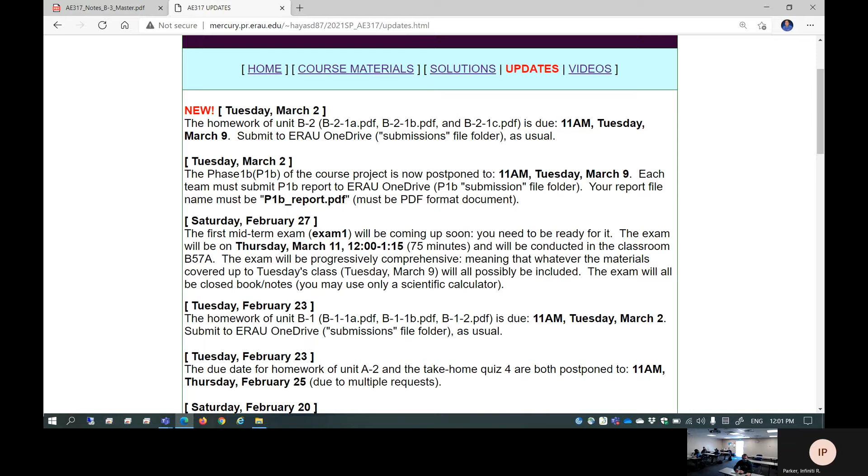Okay, that's one, sort of. Wait, Dr. Hayashibara? Yes? What's the likelihood of Unit B2 being on the exam? Well, you have almost a week to do it. I mean, you can't do it like a 3 problem. What's the chance of a question from B2 being on the exam? Well, I don't know, I haven't made up the exam yet, so it's up to my mood on the day of the exam. But you can handle it, of course. It's an easy problem. Hayashibara, you're a great professor.

Really? Yeah, wow, you're an outstanding professor. Is it sarcastic or real? No, I'm just being really nice. Fail him for being... Yeah, so Unit B1, I'm not talking about B1 or B2, sorry, okay, B2, yeah, okay.

So Unit B2, how many problems do you have? 3, yeah, I mean, it's easy problems, right? I guess, I can't copy them. Don't say that, even though it's true, don't say that. There's a solution. Fail her too, yeah, check the value.

This is aero anyway, so you see similar materials, yes, of course, from aerodynamics. We're using our resources. It's a resource, yes. Resources, until he changes. So after you go through aero 1, at least this section of flight mechanics is a joke, right? You know everything.

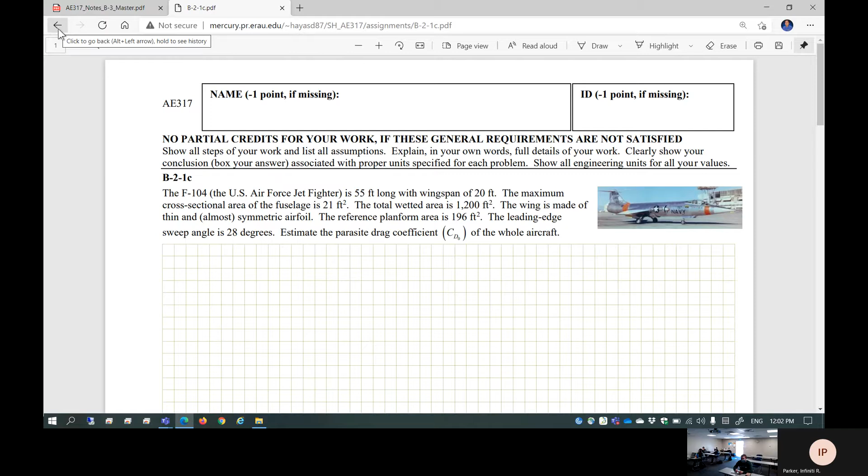Kind of thing, it's all right. We should, is it gonna get harder? Huh? Is it gonna get harder? What is a hard problem? I mean, the only thing I can do is cut and paste. I mean, I don't wanna use my brain for exam. So we can use copy paste too, right? Well, if you do everything you should be doing, I guess exam is not exam, it's entertainment, right? That's true.

Okay, anyway, so you can do it. All right, so anyways, next Tuesday everything you turn in, and Thursday you take the exam. Exam should be easy, don't worry too much about it. I guess everything is aero, so it's almost like a review of aerodynamics. Okay, so you can handle that, except probably Jordan, because you have to study like hell.

Yes, you can handle that. Am I going to be all right for that? Because I spend like an ungodly amount of time. Oh yeah, I know that. And then, yeah, I think you can survive. No problem, yeah.

I don't do anything strange. In other words, what I'm going to do, my exam is, I guess you know that, I create the exam problem by basically cut and paste, changing a little bit, that's it. From your notes, from the notes or examples or homework or quiz or something, I start from one of those, pick it up and cut and paste and change whatever. So I should focus on the homeworks and the quizzes then? Yeah, homework and quiz is essentially forcing you to review aero materials anyways, but yeah, that could show up on exam, that's right. But nothing like all of a sudden shows up out of nowhere kind of problem. No, I'm not going to do that.

Okay, question 4, question 4, yeah. Okay, your question 4 would be interesting. Well, I mean really? I mean, aero exam, there's no surprise, wasn't it? Yeah, no, there wasn't. I don't want to do that, because that's a torture. The only surprise I ever had was trying to turn it in, my printer chewing up part of my exam paper. Oh yeah, that's too bad. That was a nightmare, those kind of things happen, yes. But it's not my fault, you know.

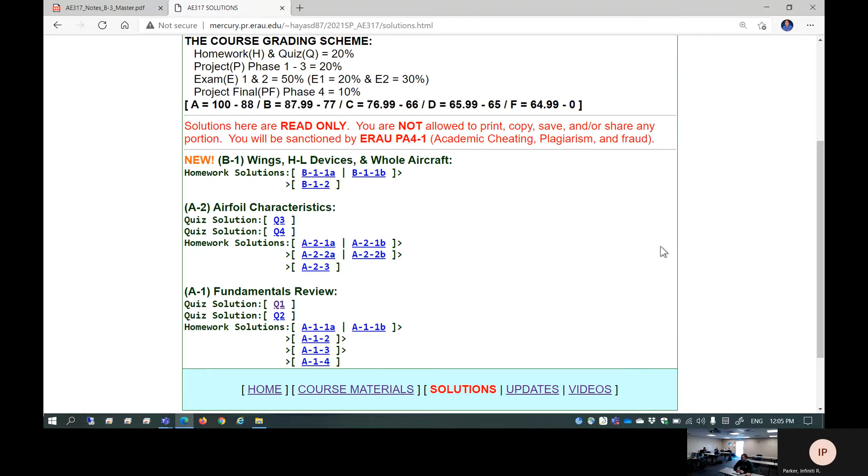Yeah, okay, any question about the exam? Next Tuesday you turn in everything, Thursday you take exam, right? That's what it goes. Okay, and then I'm going to put the solution always up before I start grading, so you have access to every solution. So I hope you know it. I mean, this is nothing new, I always post the solution. Okay, so you just always check against my solution for everything you did. Okay.

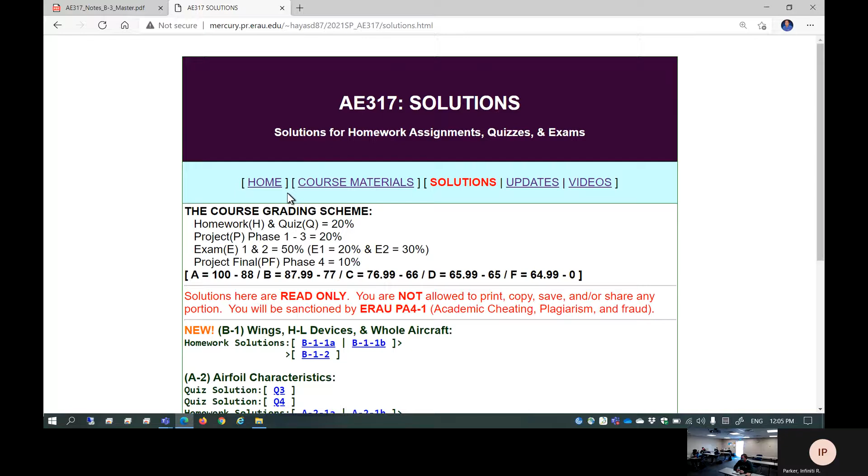Okay, so today we are going to take a look at Unit B3, Advanced Subject, and an exercise. So what kind of advanced subject are we going to cover today?

We're going to take a look at some supersonic airplane weird things, such as something called pitch up. Pitch up is a very violent, very dangerous thing for supersonic airplanes. All of a sudden, you lose stability in the longitudinal direction at high speed. It depends on the configuration. You really need to avoid it.

Also, leading edge type, depending on your wing shape, your high-speed airplane's leading edge needs to be carefully designed. Otherwise, you may potentially damage your airplane.

Now, in this semester project, almost all the teams heavily depend on XFLR5. That means your design is probably a low-speed airplane, is that correct? I have no problem if one team tries to challenge for a high-speed airplane design using XFLR5. That's okay, but you have to add a certain amount of hand calculation for the supersonic range. And if you are designing your airplane specifically only for low speed, I still force you to do high-speed calculation by hand, and the result will potentially be pretty bad.

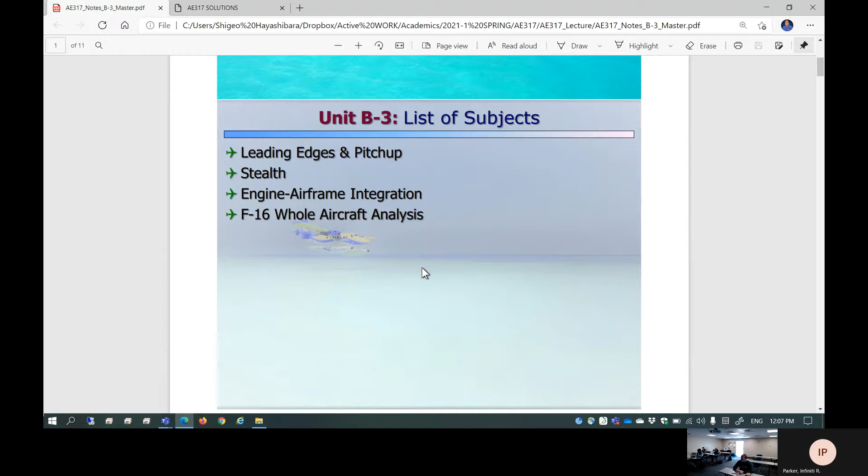Now phase 4 is stability analysis, static and dynamics, so it's about the same thing. If you choose to go for a supersonic airplane, that's okay, but obviously you need to carefully choose your shape and design to optimize for your supersonic speed, depending on the design. So it changes the focus a little bit of what you're pursuing.

Anyways, let's take a look at the leading edge and high-speed pitch-up issue. As you can see, two airplanes. One of them is actually a real airplane sitting right next to the bookstore. This is a Starfighter. The leading edge sweep is not so big, only this much sweep angle.

This airplane actually creates a shock wave starting from the root of the wing, and the rest of the wing is outside of the shock wave. So this is called a supersonic leading edge. You can't have much thickness. You have to have a razor-sharp edge, because your main wing's leading edge is exposed to supersonic flow. You have to design and build based on that fact.

Now, some airplanes have a specifically designed planform where the leading edge sweep is inside the shock angle. The shock wave is created at the root of the wing, and that angle is called the Mach angle. Your leading edge sweep is more than that, so the entire wing leading edge, except the root, is behind the shock wave. That means you only experience subsonic flow behind the shock wave.

So now the wing shape, especially the leading edge, can have a certain thickness. In other words, you can have a rounded leading edge and a fairly thick airfoil for that purpose. So this is the big difference between supersonic versus subsonic leading edge.

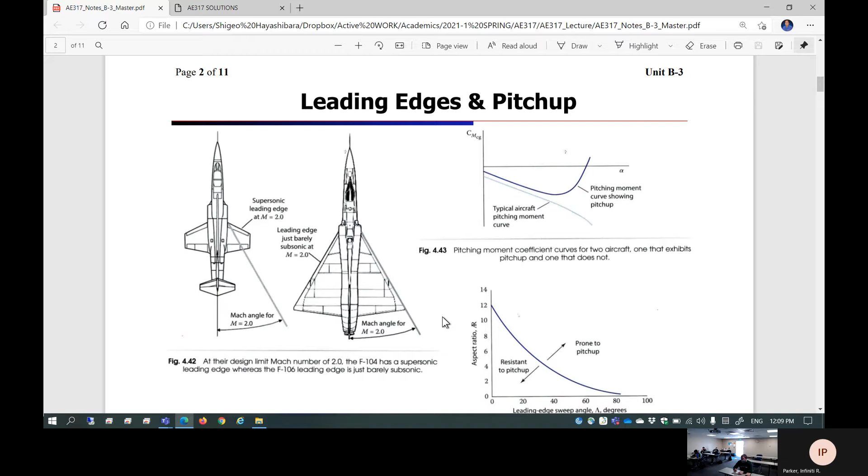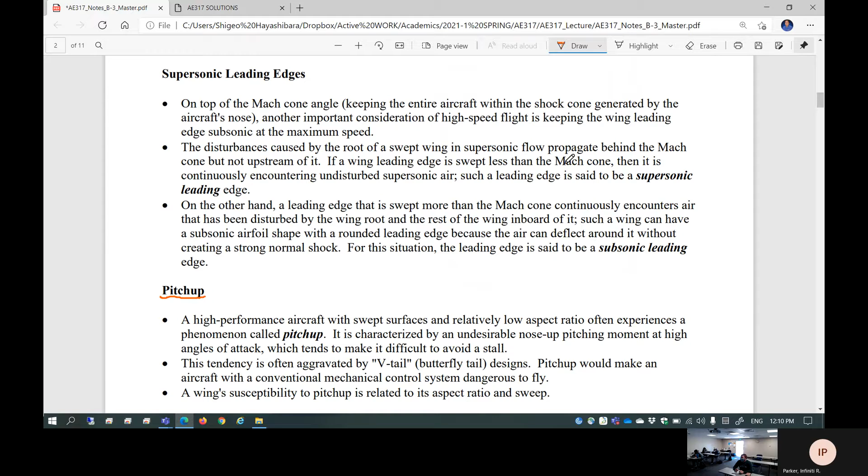The other subject is something called pitch up. Pitch up is actually very dangerous. This happens for high-performance airplanes, typically high speed, with swept surfaces and relatively low aspect ratio. Those two airplanes typically have this—very low aspect ratio wing, highly swept delta wing. Those kinds of shapes are chosen because you want to optimize for high-speed performance.

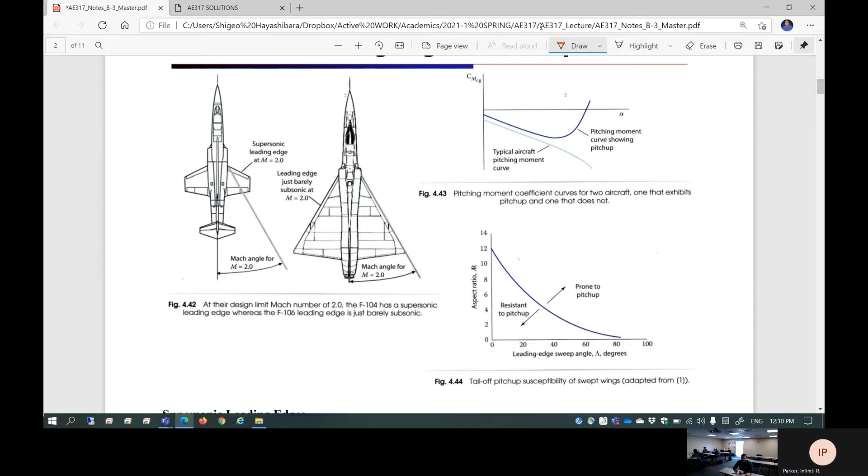However, this sometimes causes pitch up—the undesirable nose-up pitching moment at high angle of attack.

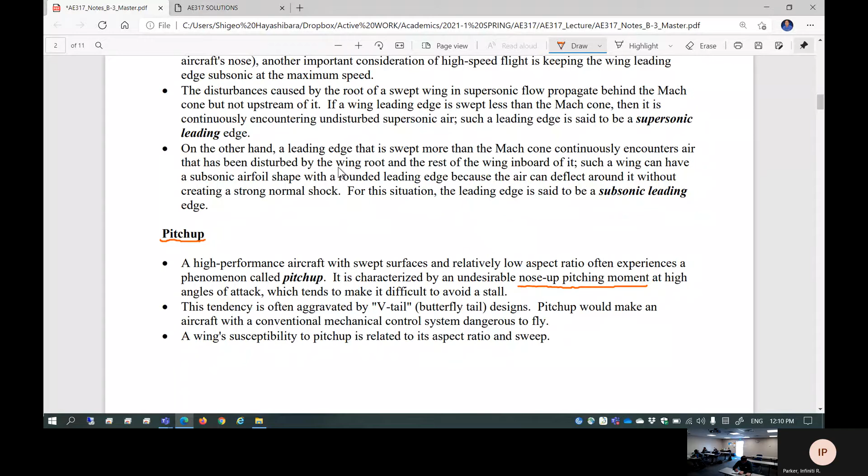Let's take a look at the plot here. This is something called pitch up. This is a plot of CMCG, the center of gravity moment coefficient. In other words, how much moment is going to be developed at the center of gravity.

So naturally speaking, as you fly your airplane in high speed and high angle of attack, how much moment you are going to experience - typically this is the normal behavior. If you're trying to pitch up your airplane, the airplane's natural tendency is to pitch down, a negative value. And if you pitch up more, that tendency becomes higher, so the airplane tries to resist and go back to the horizontal attitude.

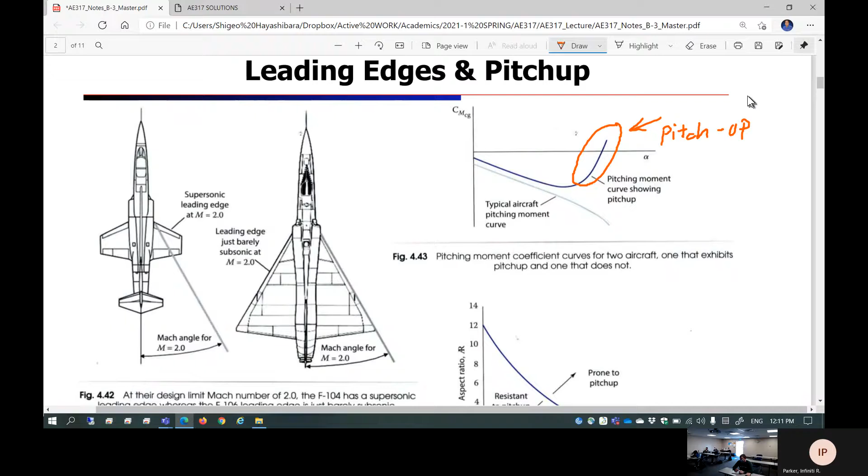This is a normal response, but some airplanes actually respond like this - very dangerous. This is called pitch up. If you try to pitch up, the airplane pitches up more, easily diverging from your maneuver, which becomes a very dangerous situation, and it's not easy to counteract and go back to normal. This is called high-speed pitch up. It's not very good, so you have to avoid it.

And oftentimes this is observed for V-tail design - this is very well known. So if you choose to go for a V-tail, V-tail airplanes have this tendency, so you have to avoid it.

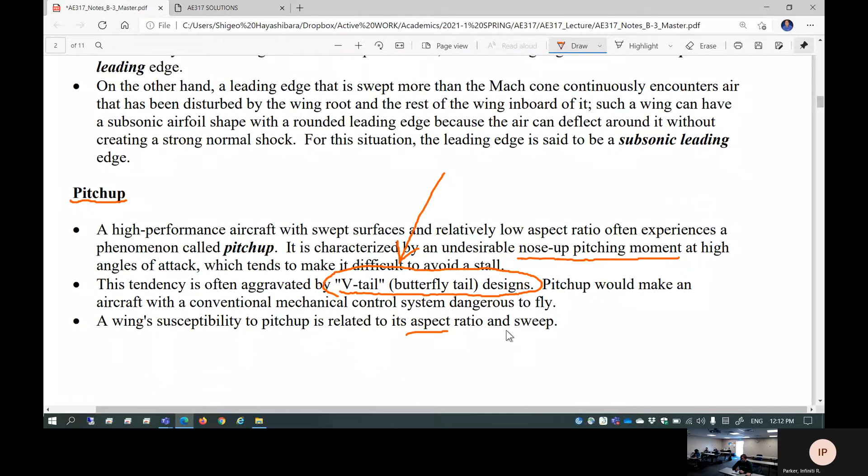Also, aspect ratio and sweep come into play. If you plot aspect ratio against leading edge sweep angle, and if you go across this boundary to the right, you most likely have the tendency of pitch up for your airplane. So you should probably keep your design inside of this boundary.

This is going to actually limit very radical designs, such as a leading edge sweep angle of 20 degrees with very high aspect ratio. What kind of airplane is that? It's like a very slender, high aspect ratio, not so swept wing - like a glider. Well, it's not good for high speed anyway.

And then it's like, whoa, I got 80-degree sweep - what kind of wing is that? Like this kind of wing. And the aspect ratio is kind of high - it's like a radical B-52, highly swept B-52. That's not good either. Oh no, that's terrible at those speeds, probably. I guess so, yeah. So those are the boundaries to avoid the pitch up.

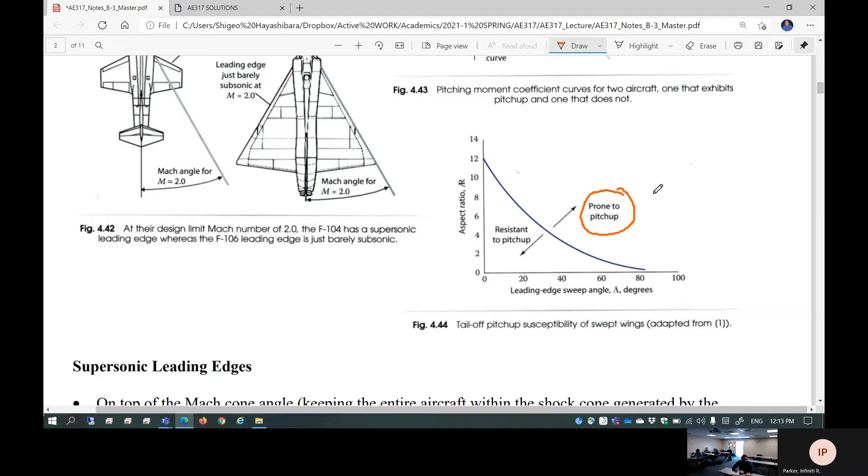Okay, for a supersonic airplane, versus about 20-degree sweep - it's about 20-degree sweep with aspect ratio of 9.6. 20 and 9.6, oops, I'm at the edge of the curve. So that airplane may potentially... that sweep could kill someone.

Suppose if you design an airplane and somebody dies, okay, your life is over as an aerospace engineer. Time to decrease that aspect ratio. So you probably either decrease the aspect ratio or decrease the sweep. But if you don't want to decrease the leading edge sweep... those are the design choices you have to face.

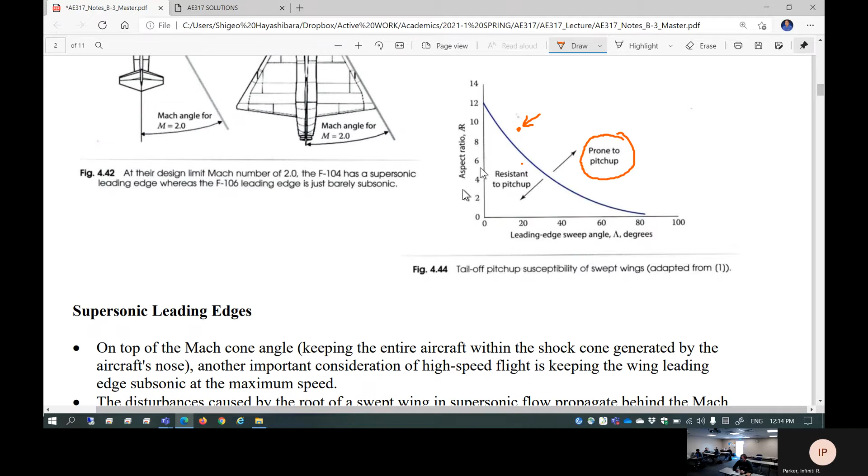So next page, I'm going to spend some time today talking about stealth technology. Now I have to tell you that I'm not a specialist in this technology, and information is not really available in the public domain at all. So this information is basically coming from the Air Force Academy's textbook - this is as much as I can share as common knowledge for stealth technology.

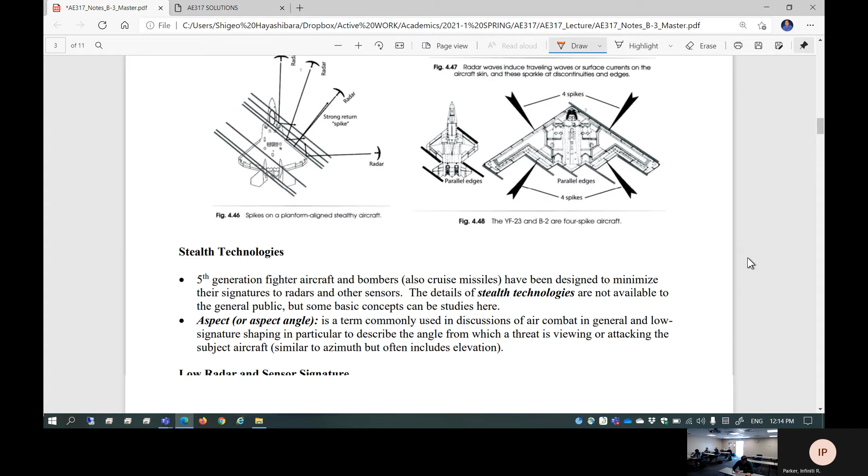Also, this winter break I took my son to Ohio and Louisiana. The reason is, in Ohio my son wanted to go to the U.S. Air Force Museum, and in Louisiana he wanted to go to the World War II Museum. So his favorite is kind of biased toward certain areas, either battle, war, World War II, or airplanes.

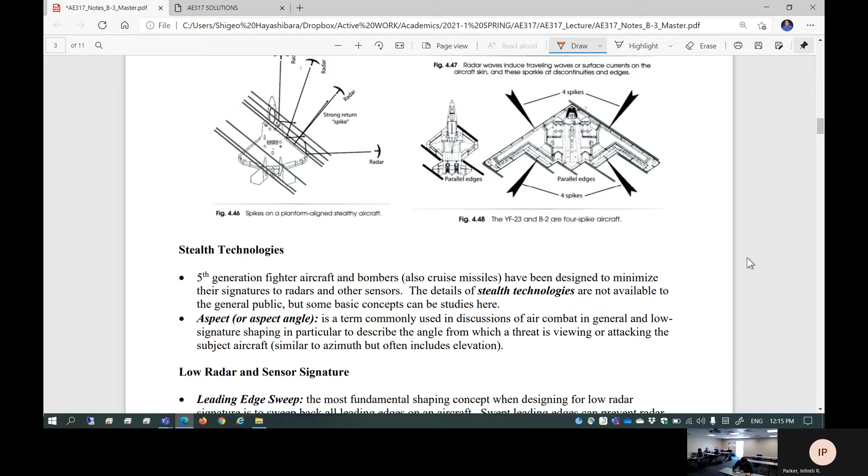And he's a biology major freshman right now. I don't know what's going on. Did you allow that? Yes, students can be a biology major at Embry-Riddle. There's not many people like that. Why isn't he an engineer? I don't know, he resists being an engineer - maybe he doesn't want to take my class. But he enjoys biology, he's just coasting every day. Unlike you, too bad. He comes into the lab, but he says she always ignores me, she's always tense. Well, of course, she's under lots of things - working, doing research, taking daddy's class. That's enough of a kind of thing. I don't know, but it's okay, just continue ignoring him.

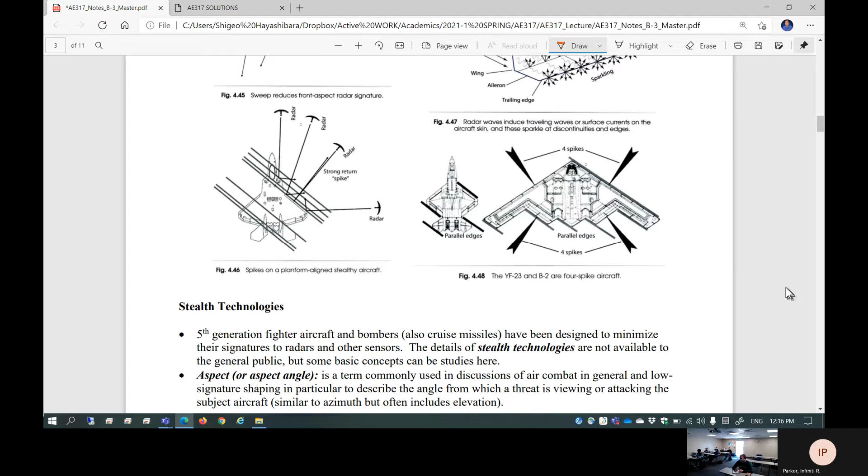Ah, okay, so those two are different. That's right. Okay, I don't know what this thing is. Oh, that's just something I made up, right? Yeah, okay, I'm maybe with that.

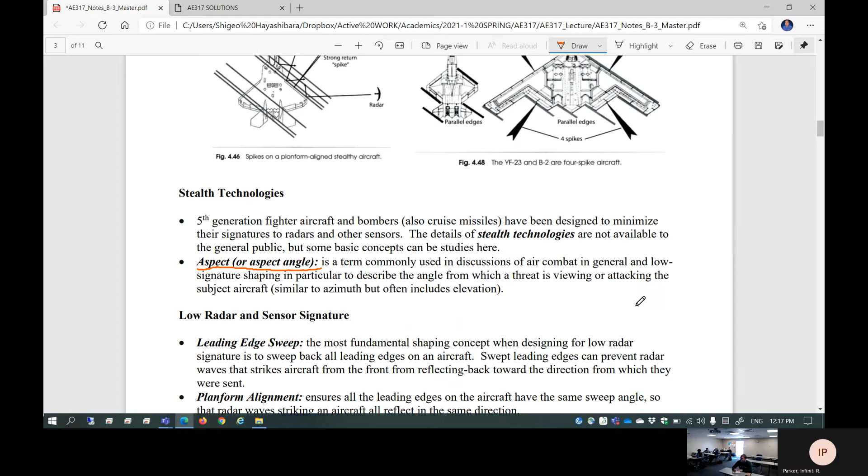So first of all, they talk about aspect angle. Interestingly, if you're standing here and look at the horizon and see an airplane coming in, what's the angle? That's aspect angle - a rough estimate of the angle from your ground point of view to the airplane, how much angle you have. It's sort of a combination of distance and elevation at the same time, so how far you can see your airplane. That's the aspect angle kind of thing, like a ground radar point of view type of thing.

So they concentrate on two areas: one is radar signature, and also sensor signature too. Let's just cover those things.

First of all, leading edge sweep. You have to have a sweep angle. If you don't have a leading edge sweep, the radar wave comes in and hits right back - that's not good. You want the incoming radar wave to deflect in a different direction, so sweep always comes into play, low speed or high speed, it doesn't matter. The F-117 is a low speed airplane but still has a sweep - they sacrifice low speed performance for stealth.

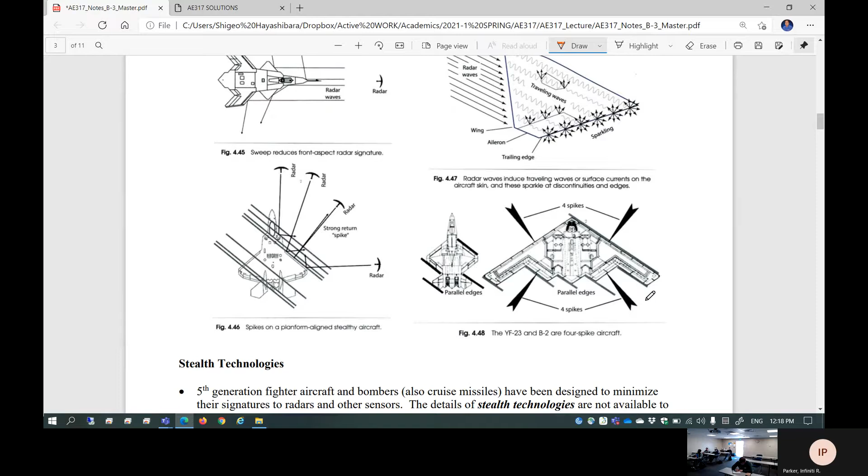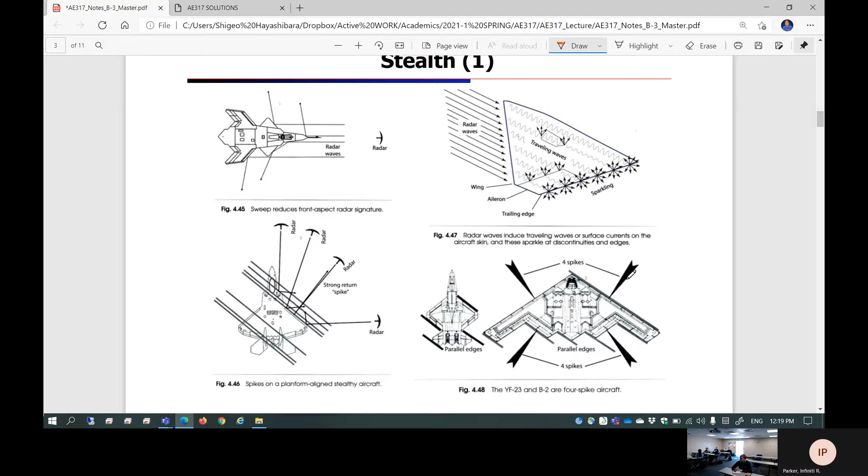Planform alignment is kind of interesting. They always want to align the angle of leading edge and trailing edge - wait, not this one, not this one, this one, here we go. So this is planform alignment. You want to align the leading edge angles as parallel as possible, so the radar wave gets in and leaves in a different direction. In other words, it's going to concentrate reflection at certain angles only - you get a radar spike at a certain angle but no other angles, rather than high diffraction all over the place, which is called the fuzzball of the radar. So as long as the radar is looking at you at that angle, the signature is minimized. That's called planform alignment.

At the same time, leading edge and trailing edge both need to have a sweep angle, and oftentimes those angles are parallel, which is the same angle.

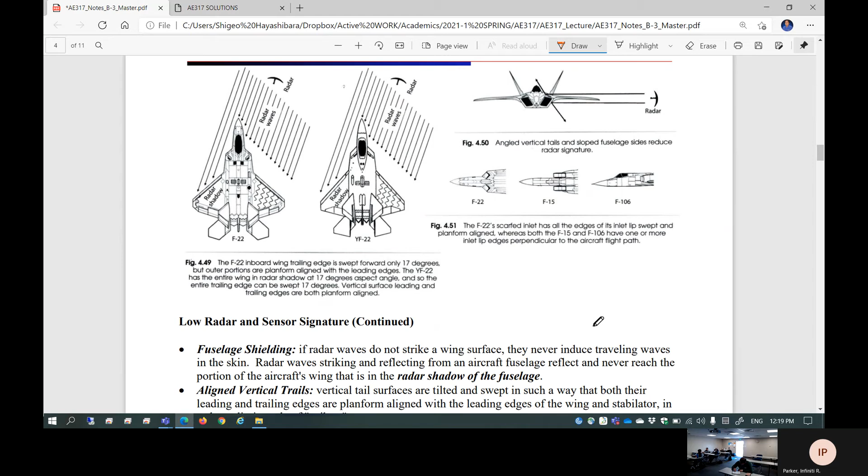All right, here we go. Also, the fuselage should have an angle too. In other words, when radar comes in and hits the fuselage, you want an angle so that the radar signature goes toward a different direction. That's called fuselage aligned.

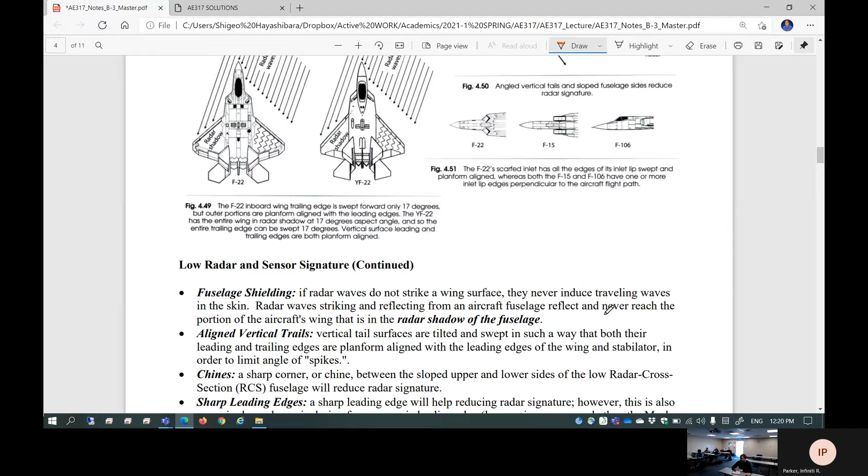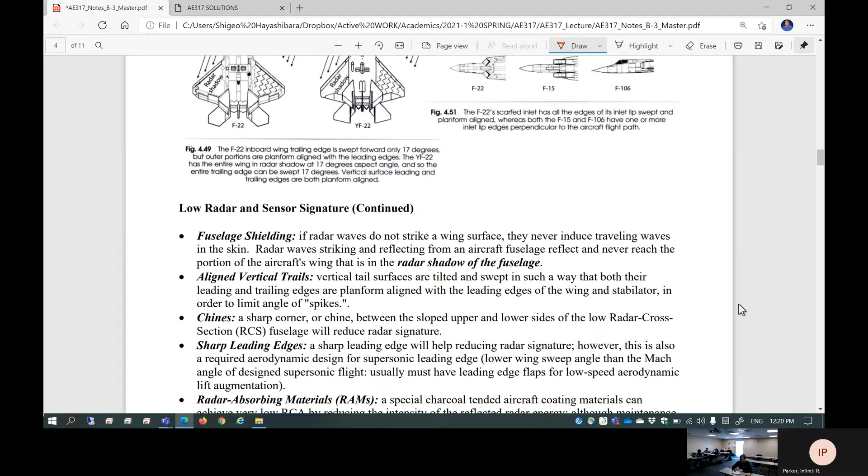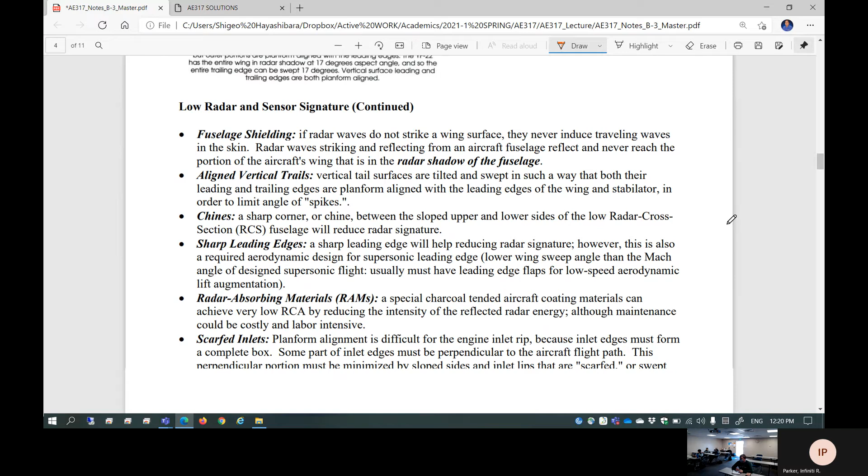Next one: radar absorbing materials. I don't know the exact type of material, but every stealth airplane comes with radar absorbing materials and also infrared absorbing materials. This is actually true if you try to take a good snapshot using an autofocus camera - sometimes it cannot focus because it's just being absorbed. So often you see difficulty taking a good shot of stealth airplanes. I'm going to show you some pictures later - one of them is not focused at all, and I suspect it's because of this absorption. I don't know yet, but I can show you the picture.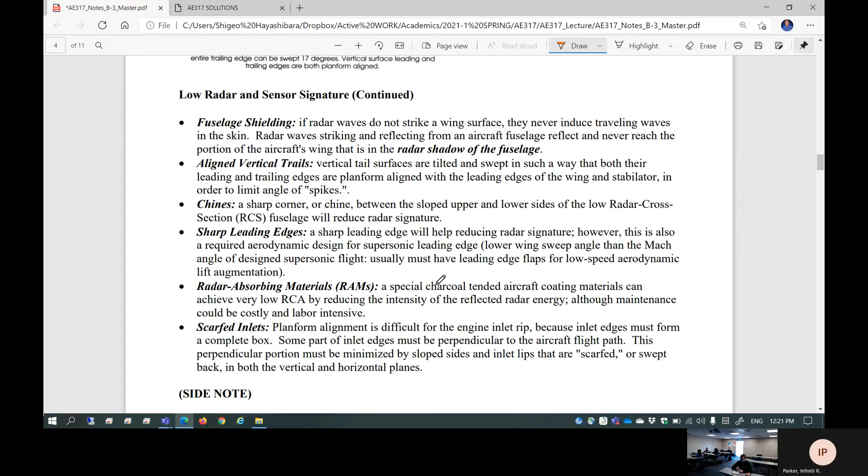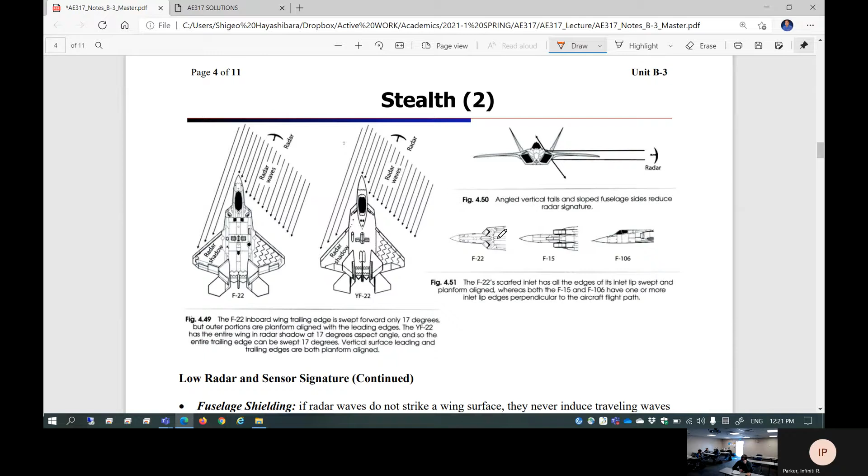Scarfed inlets - obviously some conventional type airplanes have an inlet completely perpendicular to the flight path, which is not good. Your stealth airplane shouldn't have a completely perpendicular surface against the flight path, because if radar gets in, it hits right back. So you want all the surfaces angled. Inlet lip edges perpendicular to the aircraft flight path is not good, so they want to avoid it - this is like a diamond shape, sometimes called scarfed inlet.

Also, the human eye is a sensor too, so the choice of color is quite important. The U.S. Air Force now employs medium to dark gray, with no sharp changes in color, which usually produces the lowest visual signature against the human eye. So they carefully choose the colors too.

So this is the radar signature response comparison between stealth type and non-stealth type. This is called the fuzzball of radar signature. If you don't have a stealth type of design, you have radar signature all over the place, fairly high.

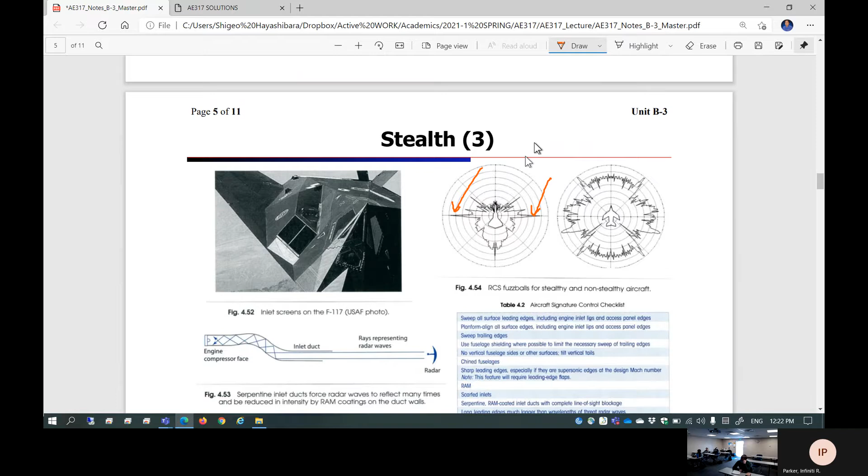Stealth means you're going to concentrate the response in a certain direction. So if the radar is looking at you from 90 degrees from the side, of course you're going to see it, but that's the only angle where you'll have a strong response. Design-wise, you're going to reflect back into a certain direction so that you minimize your overall radar response signature. And this is the F-117.

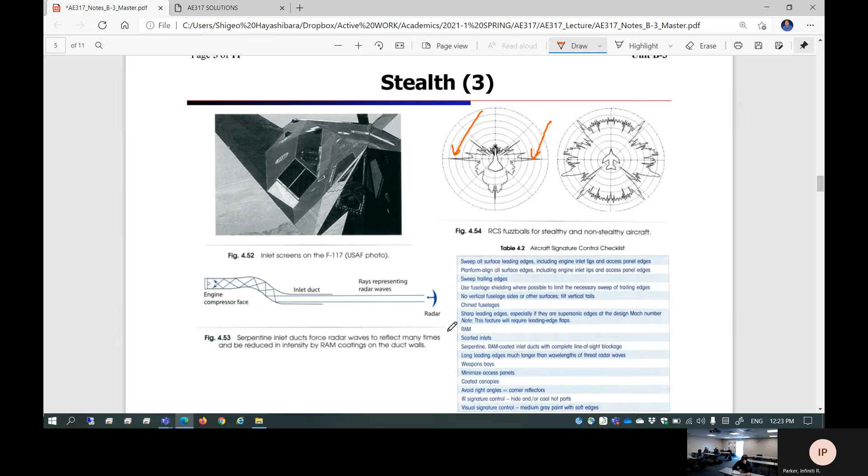You have an inlet which is not exposed at all — this is an inlet screen. The engine inlet has a curved path so that the radar signature is not going to reflect back to you. You have a serpentine type shape of the engine inlet, so the radar signature doesn't respond back to the source.

Also, sometimes the exhaust location is kind of interesting, because the engine exhaust is not really exposed to the ground. The engine exhaust is on top here, covered up by the fuselage. So I took some interesting pictures in Ohio, and I'm going to show them to you.

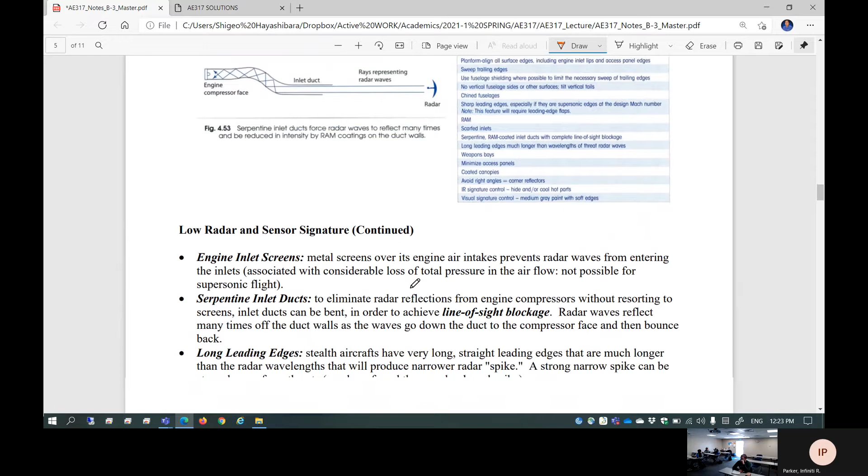Those are the kinds of things people know as common sense nowadays. There are lots more details, but they're not available in the public domain. So I have a few photos here.

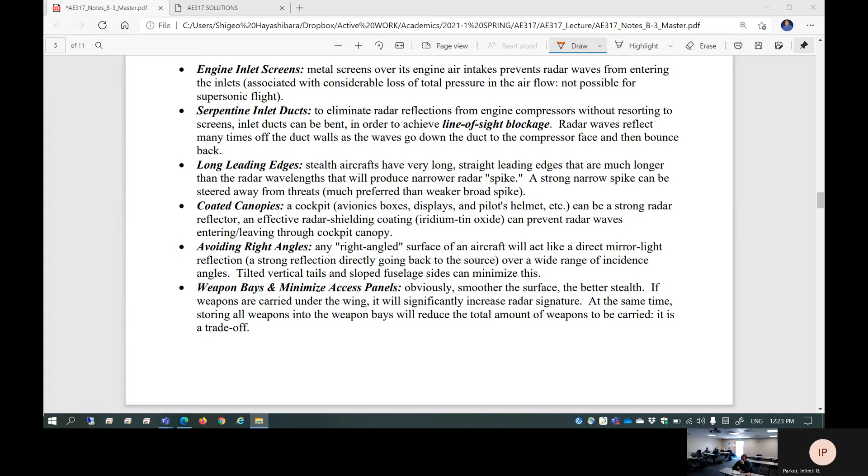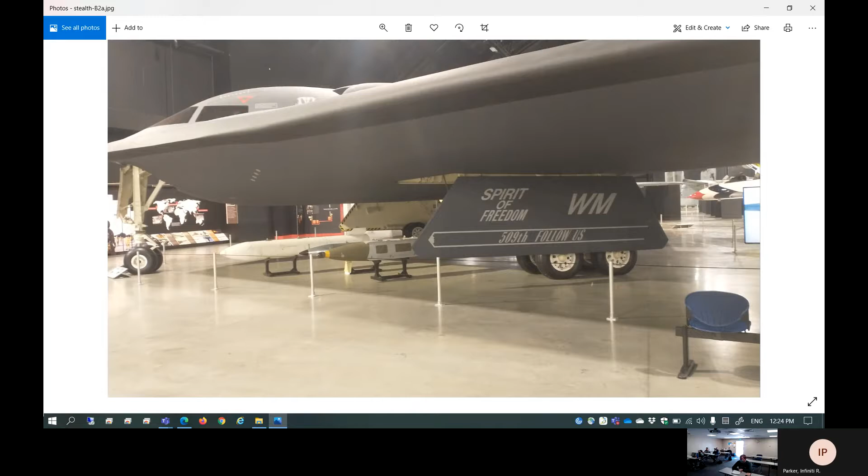One thing I noticed was, look at the surface — wow, this is so smooth. It's amazingly smooth surface here.

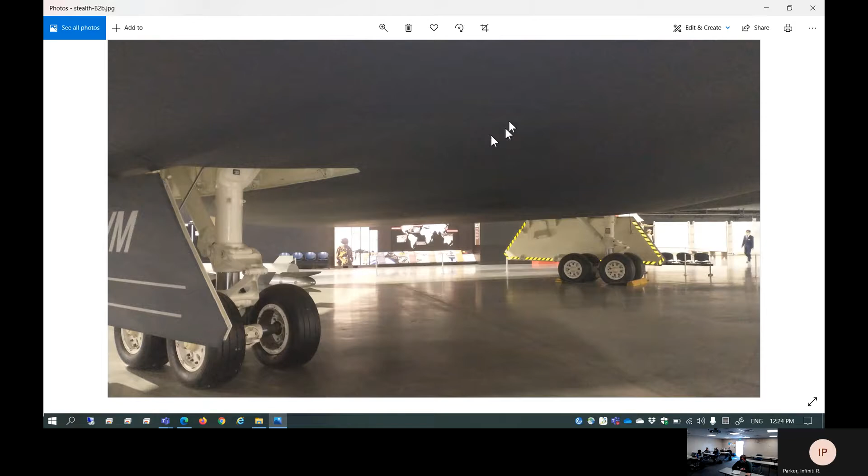This is an interesting angle snapshot from one end of the wingtip. It's a very straight line with a sweep angle, and the sweep angle is lined up with the trailing edge.

There's a student who actually graduated three years ago and got a job at Honda Jet.

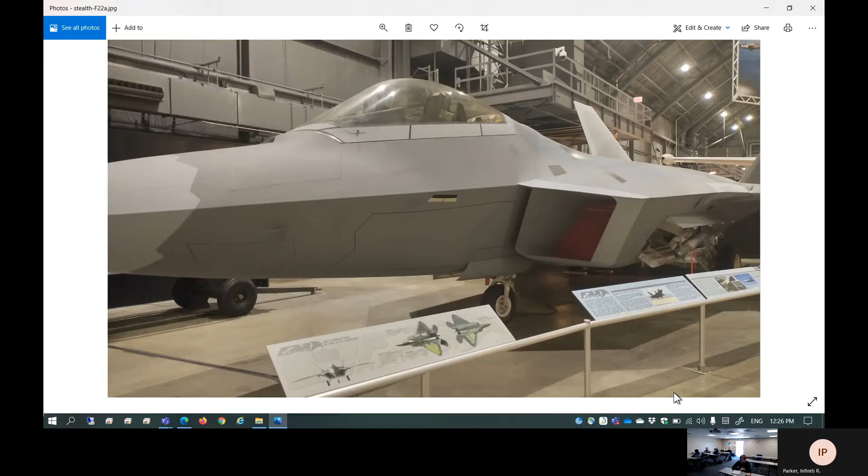This is the YF-22, this is the F-22 Raptor — I think this is prototype 1 or 2, I don't know either way. You can see this is a scarfed inlet, and also this is a cutout for the boundary layer. You have a weapon bay integrated also in the cowling, and the cockpit is shielded.

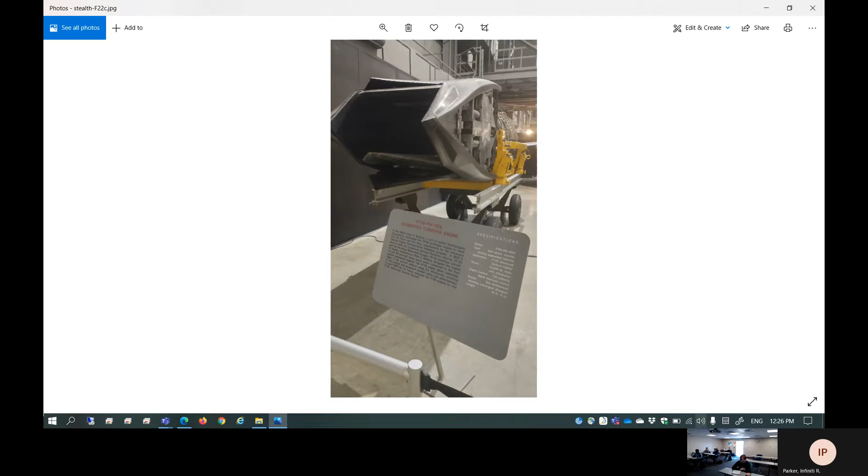This is more like a crossing view here. This is the engine, which is completely separated from the fuselage main body and mounted right next to it, placed next to it. So you're looking at the engine exhaust outlet with the thrust reverser plus vector control of the engine nozzle. This is a little bit closer picture — Pratt & Whitney F119.

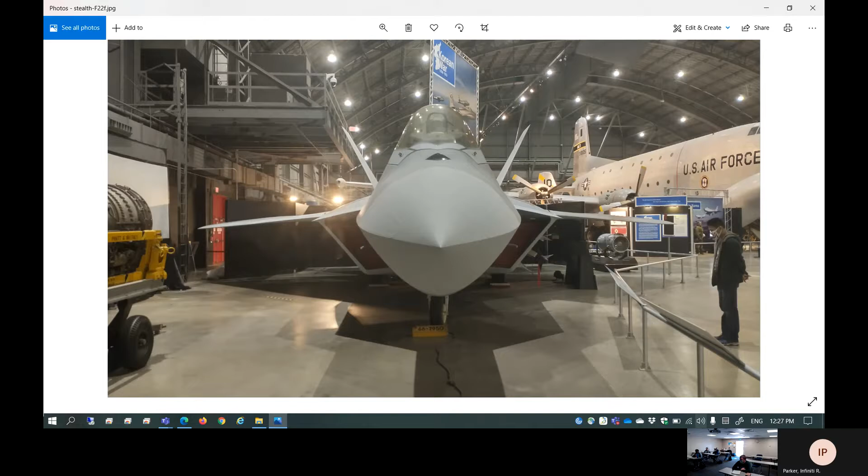So this is the other side of the picture here. By the way, my son is watching — he's actually reading the description of this airplane.

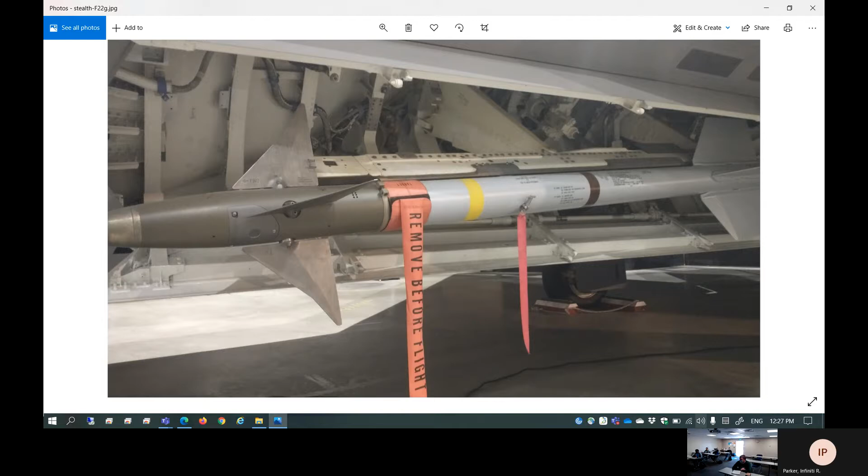So this is the integrated weapon bay. Basically, you open the door and then launch the missile. Everything is stored inside, obviously.

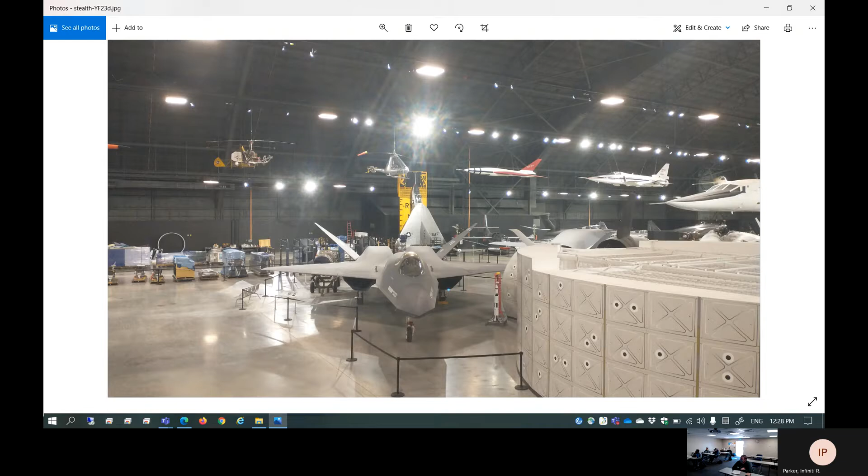So this is like a view out — I guess that's it. These are some selected pictures from the Dayton, Ohio U.S. Air Force Museum. By the way, this is completely free. They have five huge hangars, and you can walk around, touch the airplane, and take snapshots.

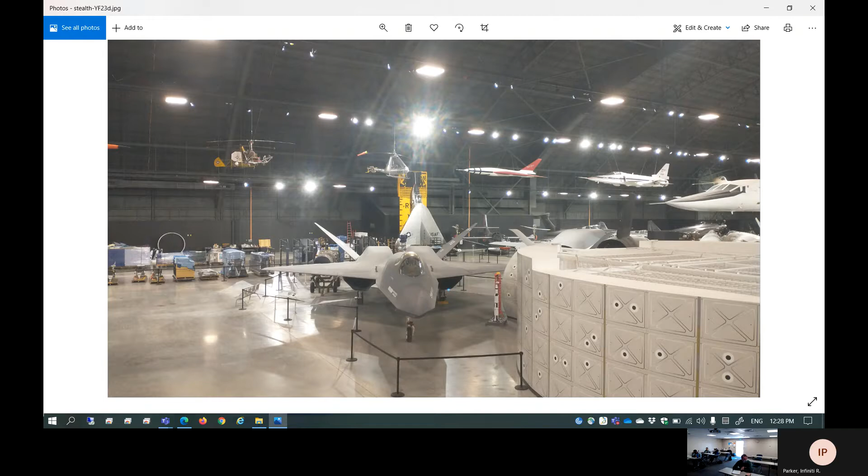You can even board the airplane. Sometimes there's a special event at night, where retired U.S. Air Force people come in and show the airplane — 'Hey, this is the airplane I flew in World War II,' showing details, letting you touch the controls, even get into the cockpit. That's amazing. We went there at 9 a.m. and I left at 10 p.m.

Yeah, and then my son said, well, I need to go back tomorrow too, kind of thing, because it's completely free. They don't charge anything. It's a free exhibit, a huge collection of Air Force airplanes. Insane. And there are lots of communication you can do, people sitting there who want to chat with you, especially if they see where you're coming from. Wow, I'm from Embry-Riddle. Oh my goodness, have a seat, sit down, do you want a coffee? And then ended up having a one hour chat with a retired World War II Air Force officer.

Anyway, you can get a flight from Phoenix to Dayton through Chicago for only $200 on Southwest. It's worth the money, yes. Field trip! Get the school to fund it. As a matter of fact, I'm starting to think about it. That's a good idea, yes.

And they also have a NASA exhibit, space shuttles and rockets. There's a cafe in the middle of the hangar so people can watch the airplanes, rockets and spacecraft while eating lunch. Oh my goodness, that's how beautiful it is. So yeah, that facility is amazing. Okay, thank you for that, I'll think about it.

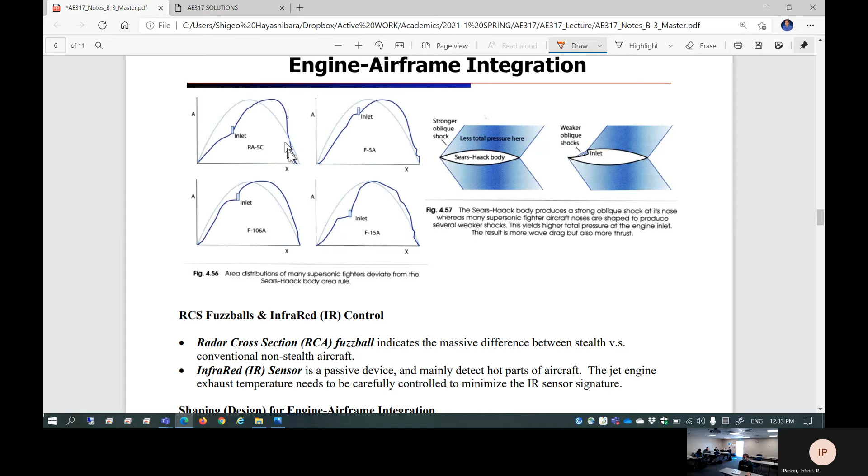So oftentimes you're going to change the shape this way, purposefully allowing the shape to create a series of weaker shock waves before you hit the inlet. That's better for the engine. Obviously you're going to increase the wave drag for the airplane, but it's better for the engine, so oftentimes people do that. They deviate from the ideal plot based on the Sears-Haack body function, which says the area ratio needs to be distributed like this. If you strictly follow that rule, your fuselage needs to be wasp waist shaped, but often, if you're trying to integrate your propulsion system at high speed, that's not the best choice. This is the location of the inlet, and this is the actual area ratio distribution for each airplane.

Yeah, so that's the engine-airframe integration.

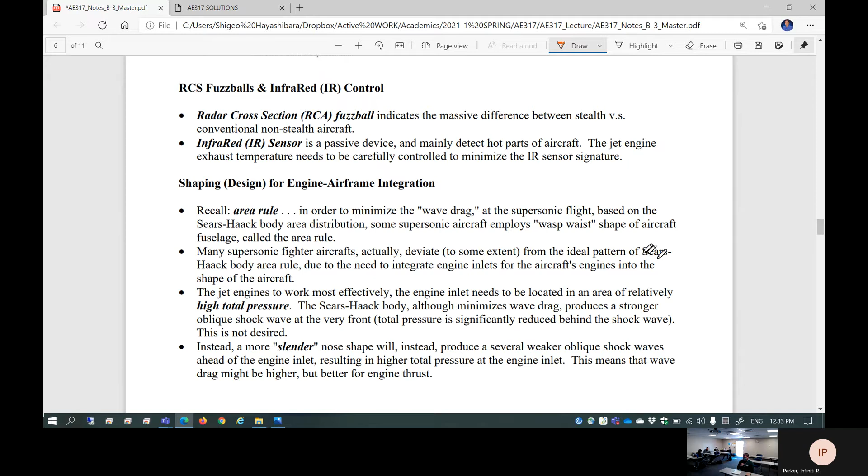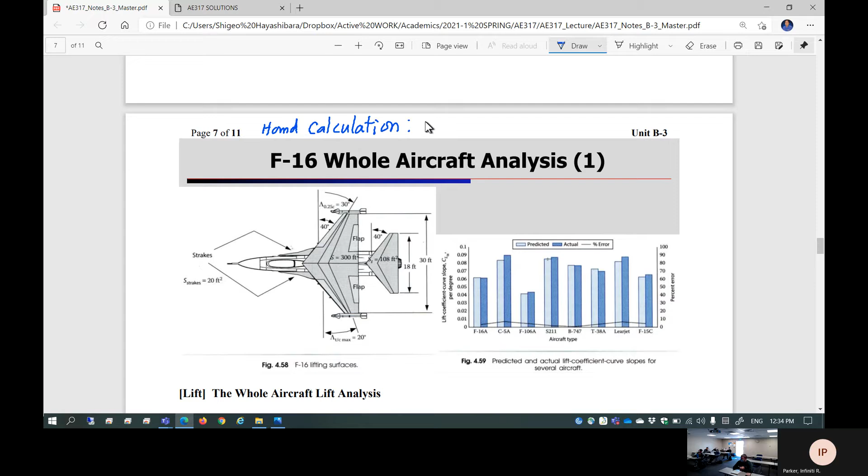Now, starting from page 7 of this unit B3, this is entirely an example of hand calculation to predict your overall airplane lift coefficient and drag coefficient for the entire airplane. This is the hand calculation example. You need to do the same thing at phase 2 of your project. So this is theory-based hand calculation, covering the whole airplane lift and drag.

I think we talked about phase 2 already, maybe not. So let's take a look at phase 2 of the project for a moment. Obviously you're going to complete 1B next week, and after that, what happens is phase 2.

So at phase 2, based on phase 1 and phase 1B, your team is going to come up with the baseline requirements of your design: what kind of airplane you're going to design, what are the constraints, what performance you want to achieve, kind of thing.

Based off of that, each member is going to design the cross-section, and based off the cross-section, you're going to actually design the wing. Each member comes up with their own idea of the best wing design, and then as a team you come together and pick the best wing design.

Based off of that best wing design, once again each team member comes up with the airplane configuration. Then you're going to come together and compare which one came up with the best overall airplane configuration. So at this point, phase 2, your design sort of quickly comes together.

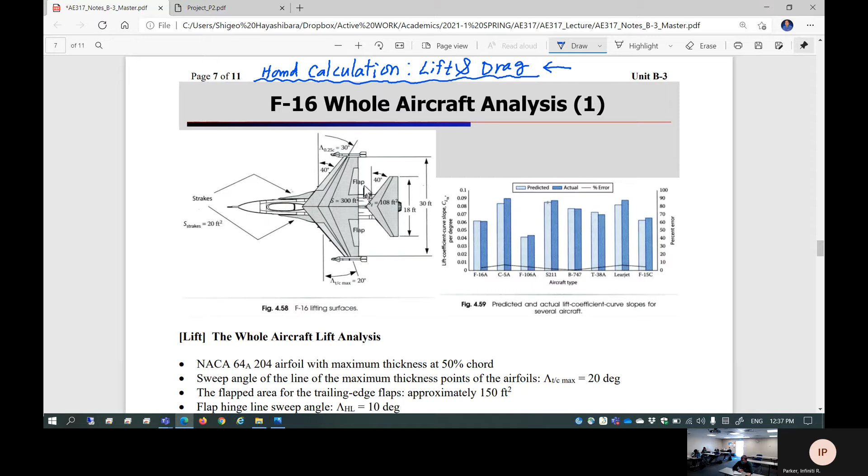At this moment, you haven't completed sizing, but you come up with a certain sized tail, stabilizing surfaces, and control surfaces. For sizing, you'll probably need to resize it later, but you can come up with certain size and configurations.

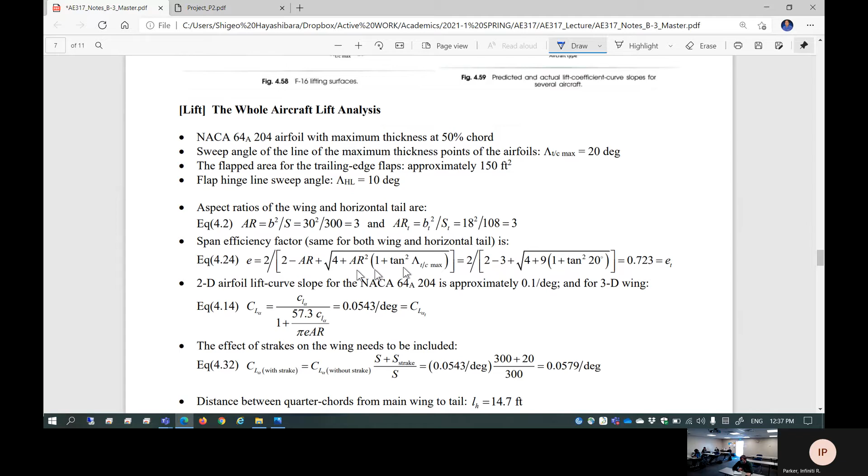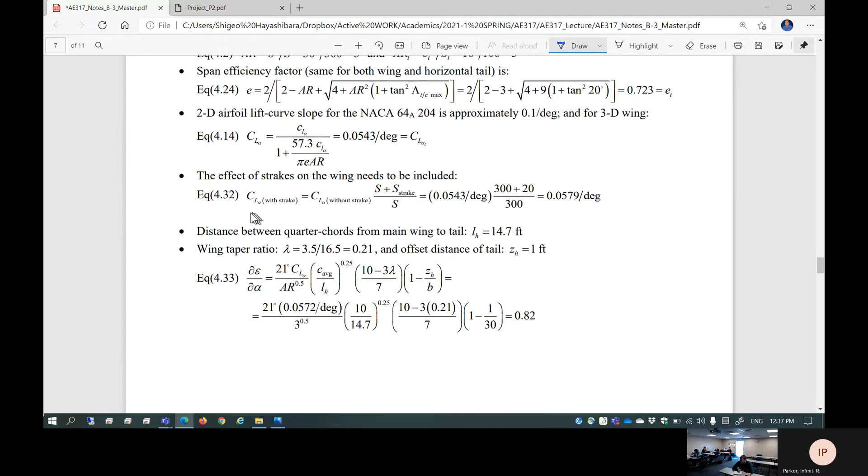And then you're going to go through this example to compute span efficiency factors, compute lift curve slope for main wing and tail, and lift curve slope for added surfaces. And then you're going to compute the rate of change of the downwash angle with respect to the angle of attack.

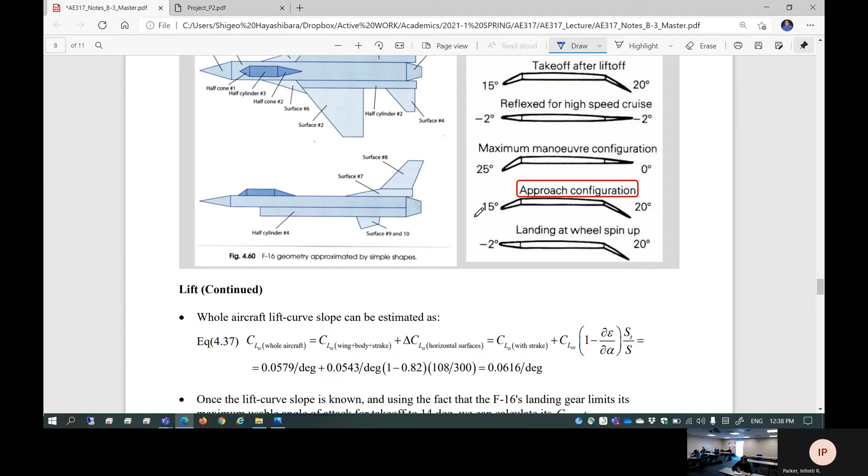And then takeoff and landing configuration, you need to come up with it. XFLR5, of course, allows you to put high lift devices on it. So based on your current configuration, you're going to come up with the augmented lift coefficient for touchdown and takeoff.

So this is the F-16's takeoff and landing approach configurations given, and also this is the surface which is simplified for the F-16.

In other words, back in old days, there was no CAD, everything was hand-drawn by drafters. It is fairly difficult to come up with the surface area of the entire airplane, so you have to simplify it into a series of simple shapes. In this case, this is a simplification method — this is the F-16 simplified with a series of simple shapes.

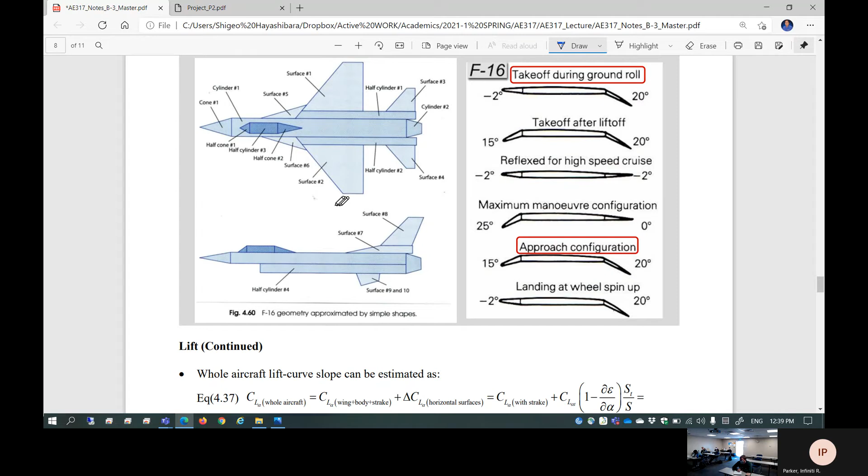In other words, a triangular shape here, this is a cylinder, this is a tapered cylinder, and this is another triangle. Those are the areas which are estimated, or like a simplified surface, and you're going to add them up.

So this is a wetted area estimation. You're going to use the series of simplified surface shapes and add them up to come up with the wetted surface area. Nowadays, because you're using CAD, it's capable of giving you the wetted surface area directly, but back in old days this was the only way to determine wetted surface area because everything was drafted on a piece of paper.

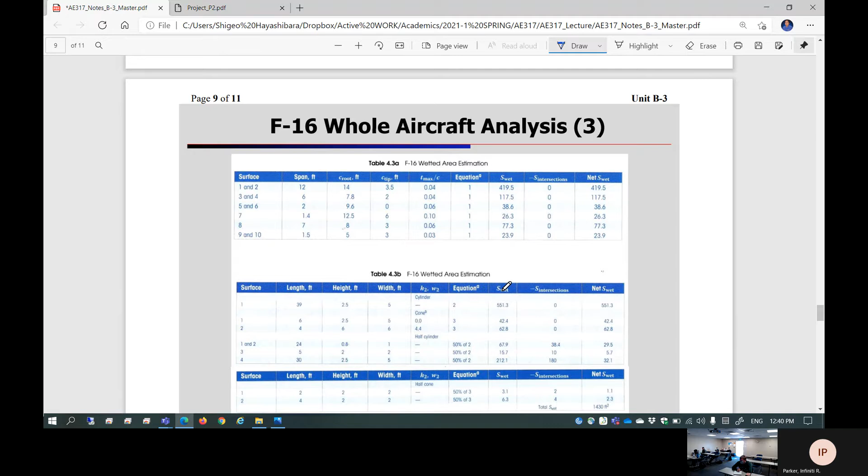XFLR5 may or may not — I don't know, you have to find out — give you the wetted surface area as data. I think they will, I hope. If so, it's easy: you can take that estimated wetted surface area, using the simplified shapes, and compare it against XFLR5's actual wetted area.

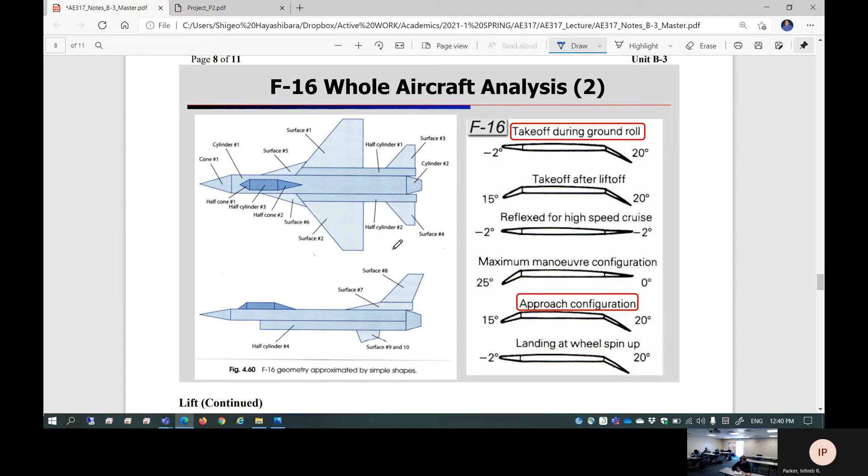Because wetted area is going to impact your parasite drag coefficient, right? Zero lift or parasite drag coefficient, I should say. Wetted area comes into drag, and that is going to give you the total drag coefficient due to skin friction drag.

You're going to estimate the total lift for a given angle of attack or configuration of takeoff and landing. That's probably a single, 2, or 3 data points. XFLR5 actually gives you multiple data points so you can plot it, and easily compare the software-generated value against the hand calculation value. This is a verification process for your software code.

Once the software is verified, you put trust on it and move forward doing a series of different configurations and simulate. So simulation-based design optimization you can do. This is a demo for that.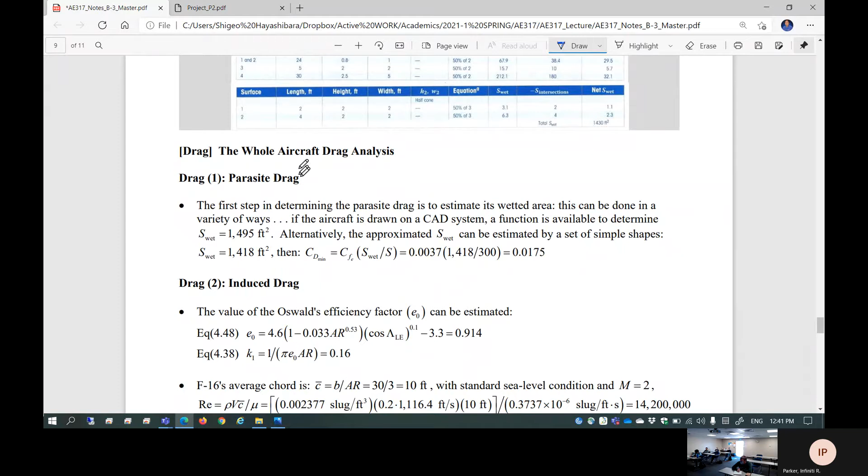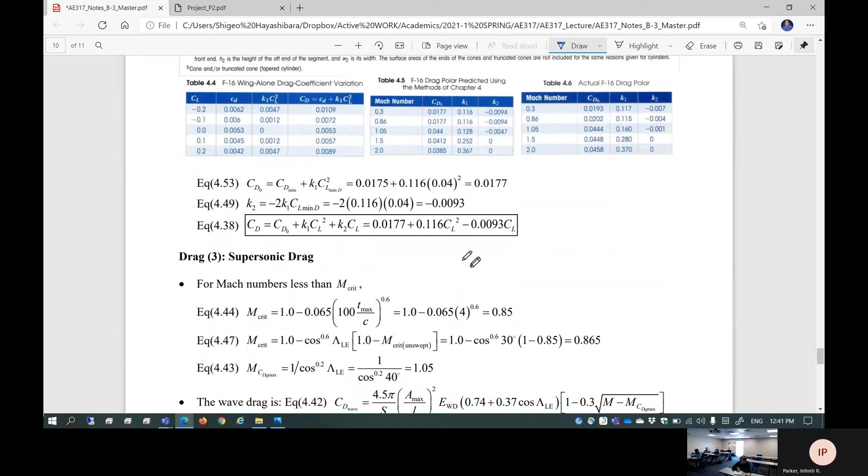You are going to go through the step-by-step process for lift and drag. For drag, you're going to estimate parasite drag and induced drag, those two added together for low speed. And if you go for high speed, you're going to add supersonic drag, wave drag, and estimate and add it. Even though your airplane is designed only for low speed, you're going to compute this one.

Of course XFLR5 cannot do this. Let's just note: supersonic drag, this is hand calculation only, XFLR5 is not capable. So if your airplane is designed only for low speed, you're going to do this to find out, if this airplane flies high speed, what kind of drag increase am I going to expect? It could be a fairly bad value, but you can find out anyway.

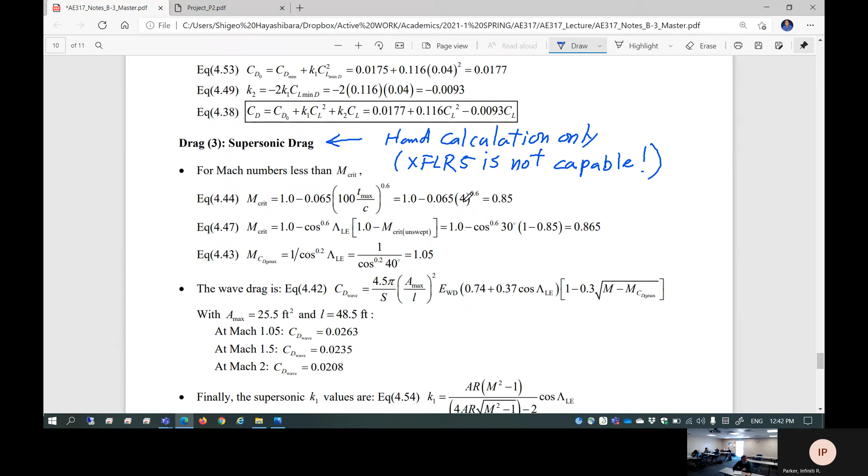So this is entirely an example so that you can use it to finish up your project phase 2.

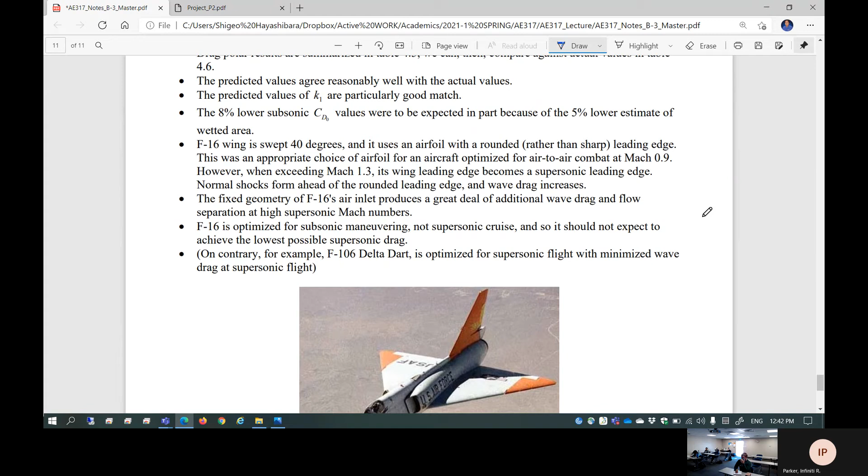I have a few more things to share today. This is basically Unit B3 done. I can possibly say Unit B3 homework is due, blah blah blah, but let's do it after the exam.

Exam material covers up to Unit B3, I can safely say that. I'm not going to probably cover Unit C. Unit C is performance, so it's not aerodynamics anymore. Let's just assume that the first exam will include only Unit A and B materials.

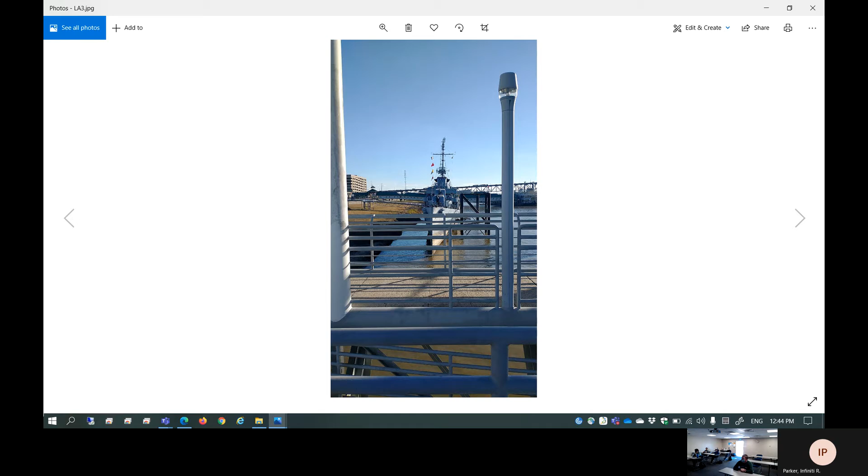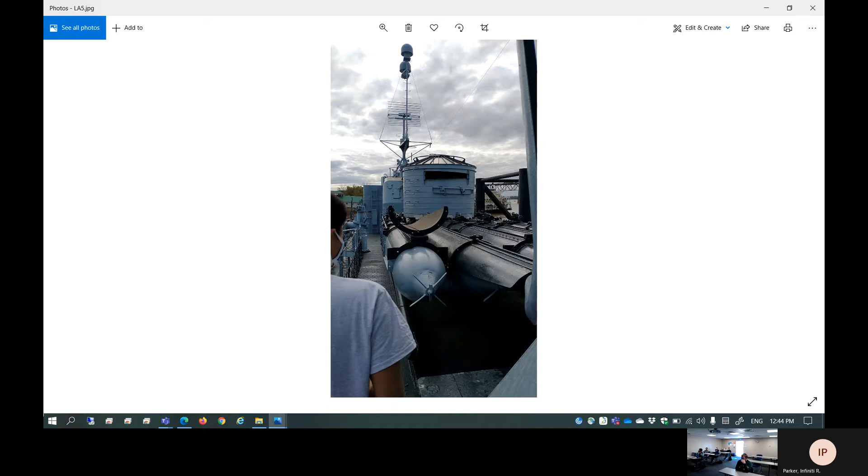Also in Louisiana, this is Baton Rouge, right by the Mississippi River. There's a USS Kidd, a World War II destroyer restored here, and you can freely get inside and take a look at everything. This is the USS Kidd. There's a building right next to it, the USS Kidd Museum. This is a fairly small ship, a typical World War II U.S. destroyer. This is the torpedo tube.

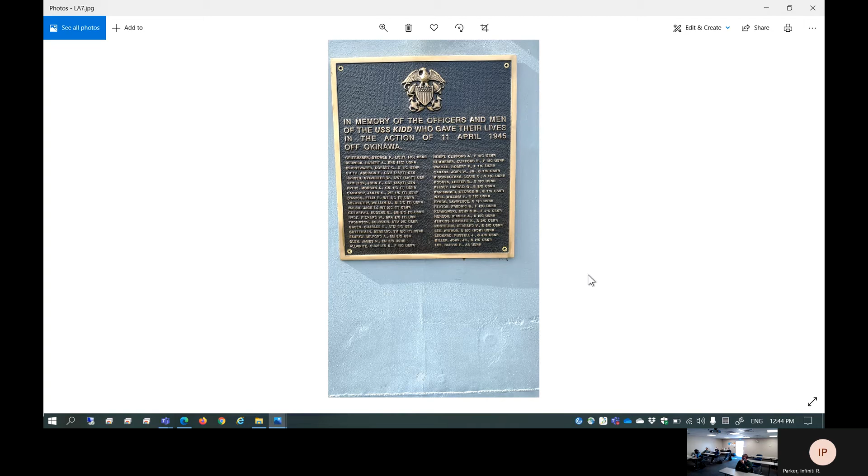I found an interesting thing here, let's zoom in. There was a teenage girl volunteering, painting the ship or something. I stopped and asked what she was doing. She said, I'm volunteering, my grandpa went to World War II with this ship and came back, survived, but his best friend died in Okinawa in 1945. About 38 people died right here on this spot, there was a kamikaze attack here, 38 people died. Then I said, oh, by the way, we are from Japan.

I don't want to emphasize my origin as Japanese because it has probably not much difference against other people, but since I have a unique background being born and raised in Japan, way after World War II, I have nothing to do with those incidents. But because I was born and raised in Japan, I understand the culture, history, and those things much more detailed than, I should say, quote unquote, Americans. I'm American, I'm a US citizen, but a naturalized citizen. So yeah, this was a very interesting encounter.

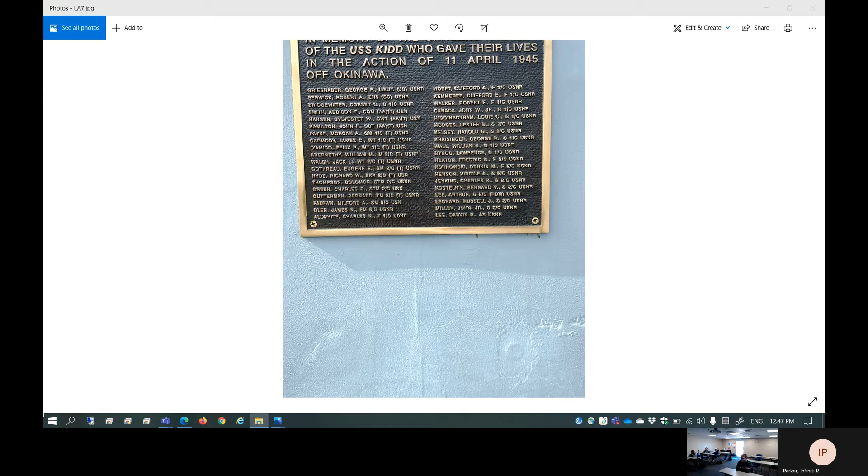Highly valued mindset as being American. So let's go back to Ohio once again, to the Air Force Museum. I found this airplane.

Since I'm Japanese, I can sort of tell, and then I chose to be an aeronautical engineer coming to the United States. I have a few thoughts sometimes. When you do something, trying to achieve something, motivation, purpose, goal is everything. Sometimes if you begin something with the wrong motivation, you may end up having this kind of thing. It's not necessarily good or bad. This actually happened. I don't have any opinion, or rather a negative opinion. If I'm forced to design this kind of thing, I would probably say no.